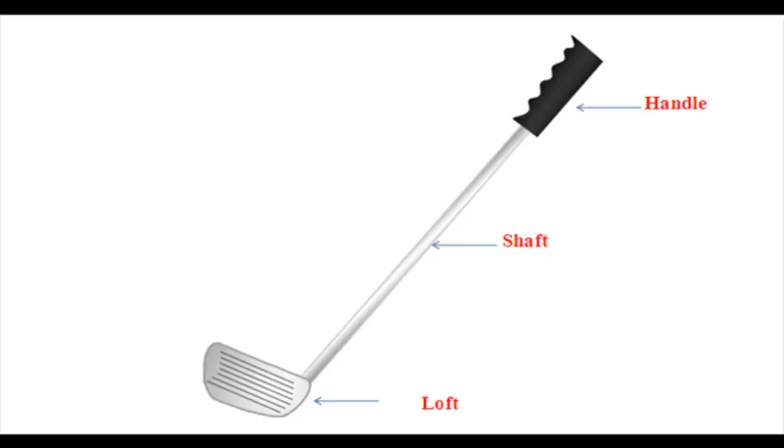The video shows the manufacturing of golf stick using metal forming techniques. A typical golf stick consists of a shaft and loft without any seam, with a handle for grip.

A die for extrusion of the shaft of the golf stick is shown in grey. A section view of the die shows the threaded portion for the handle grip.

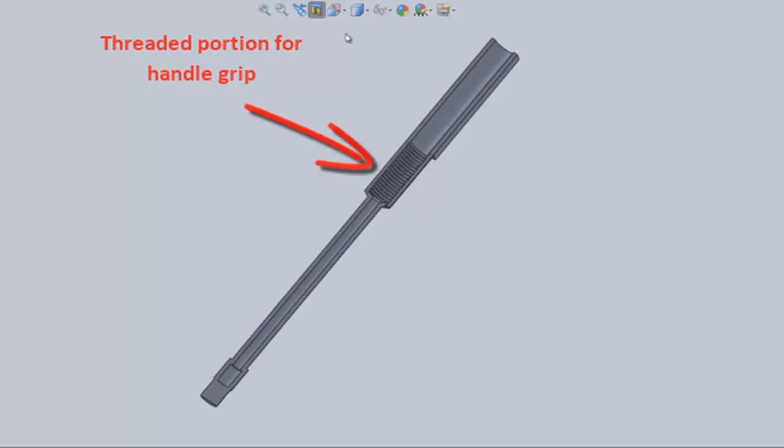In step 1, a red billet is placed at the top of the cavity in the extrusion die. A yellow plunger presses the red billet through the shaft channel in the extrusion die. It also has an accumulated portion for the loft at the end of the die.

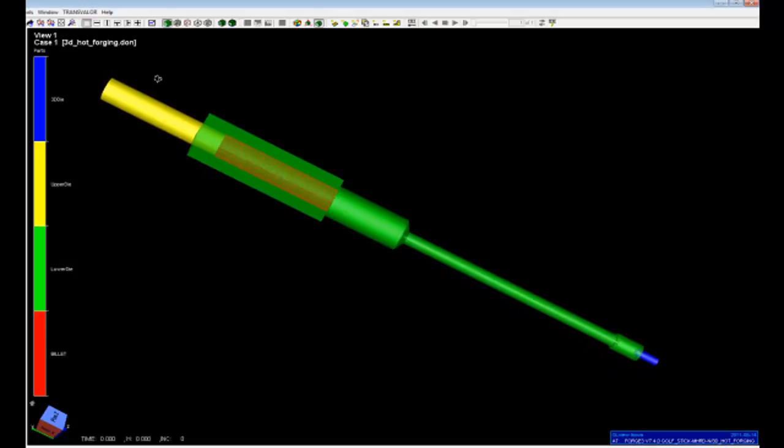The billet progressing in the die can be seen, and the temperature of the billet can be determined by the scale on the left hand side. After extrusion, forging of the loft is done to create different club heads.

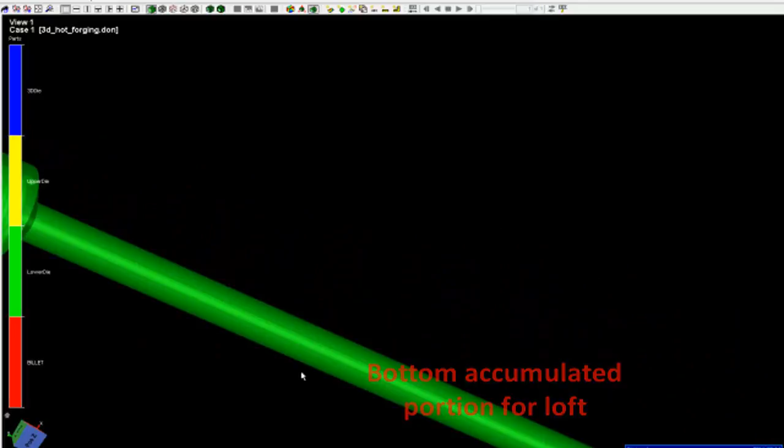The dies shown in green and yellow can have different cavities depending upon the club. After forging with the dies, the final loft section is shown at the end of the video.

The video shows the manufacturing of golf stick using metal forming techniques. A typical golf stick consists of a shaft and loft without any seam, with a handle for grip.

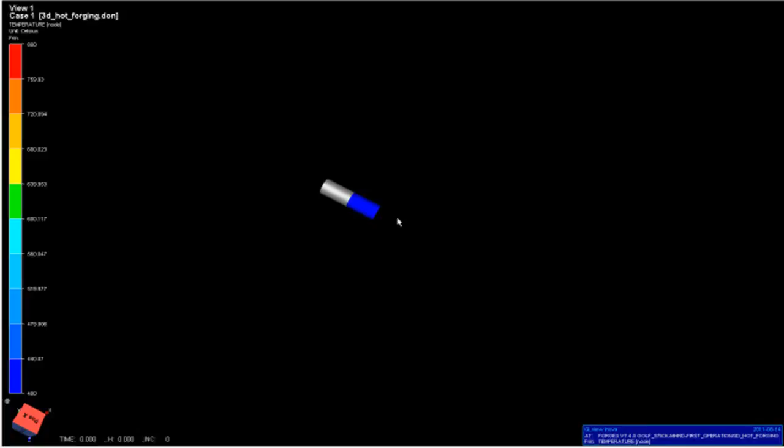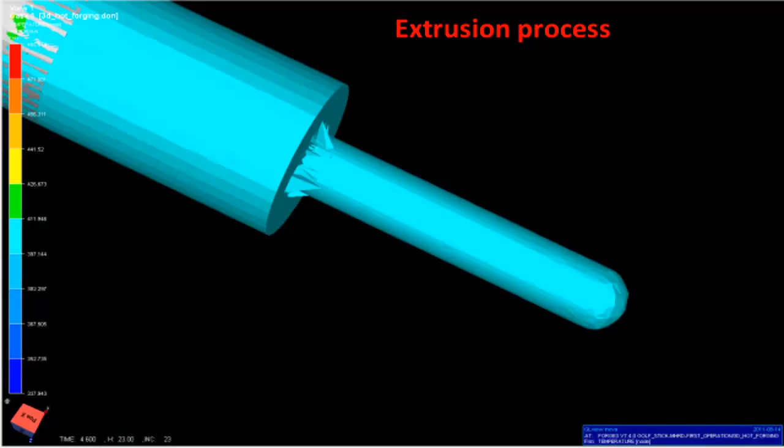The billet progressing in the die can be seen, and the temperature of the billet can be determined by the scale on the left hand side. After extrusion, forging of the loft is done to create different club heads.

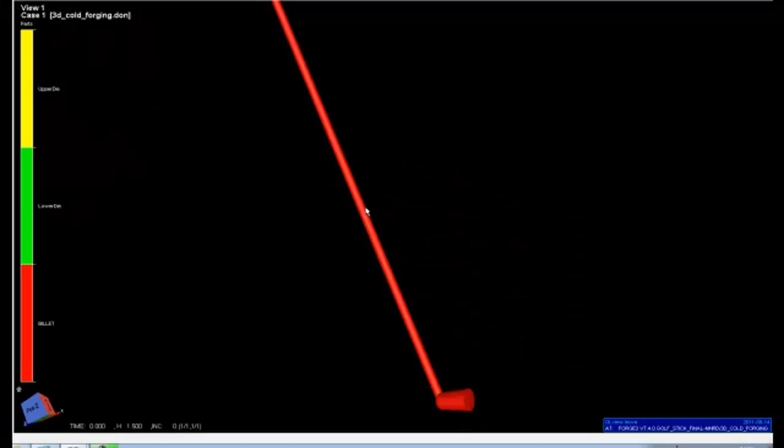The dies shown in green and yellow can have different cavities depending upon the club. After forging with the dies, the final loft section is shown at the end of the video.

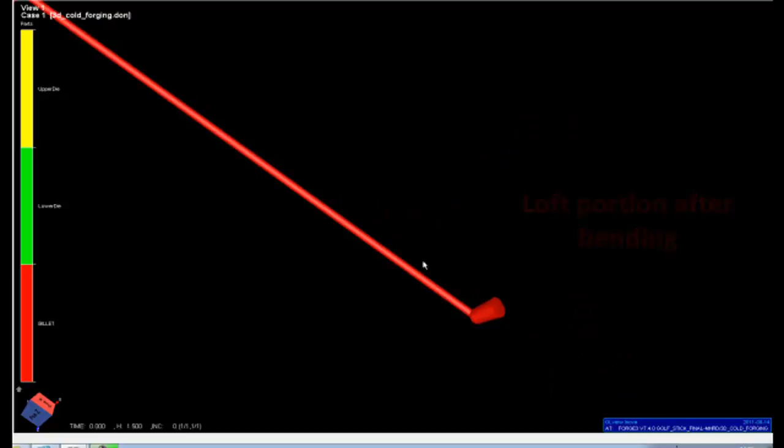The video shows the manufacturing of golf stick using metal forming techniques. A typical golf stick consists of a shaft and loft without any seam, with a handle for grip.

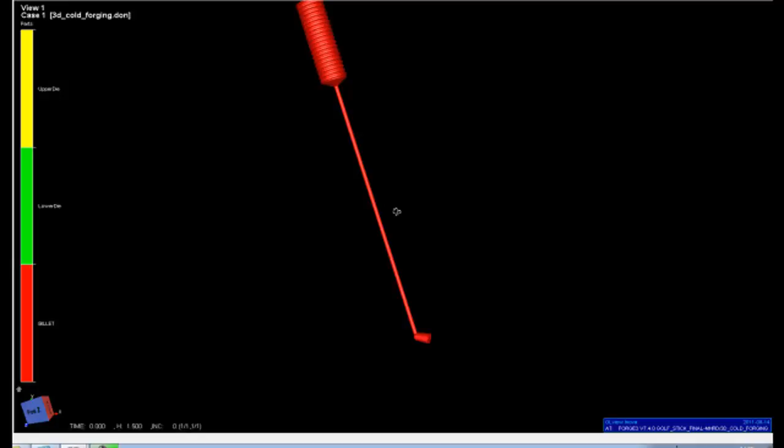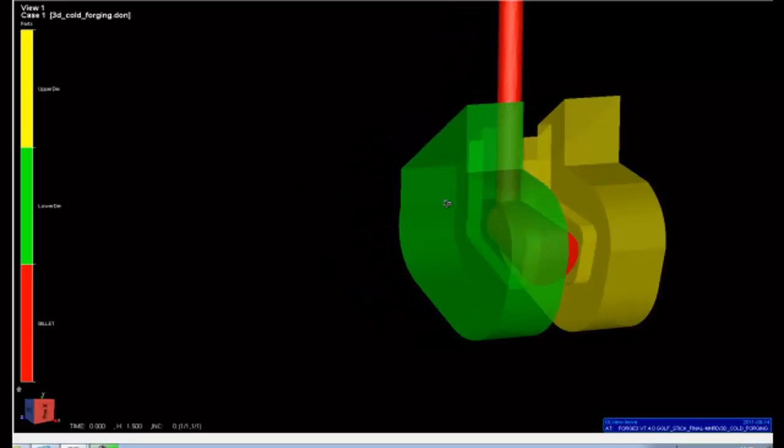In step 1, a red billet is placed at the top of the cavity in the extrusion die. A yellow plunger presses the red billet through the shaft channel in the extrusion die. It also has an accumulated portion for the loft at the end of the die.

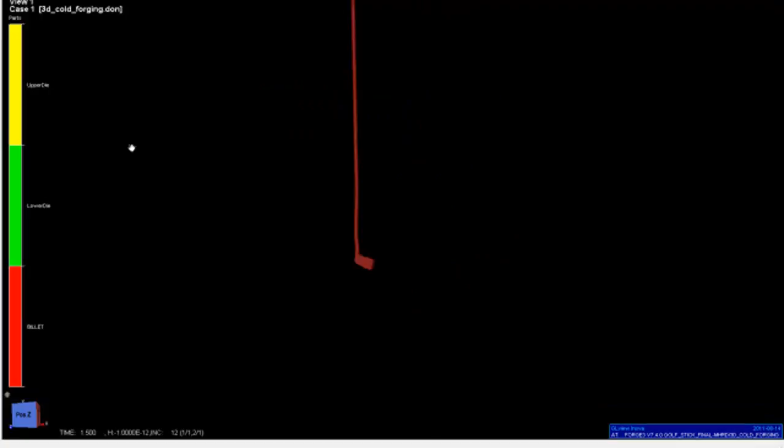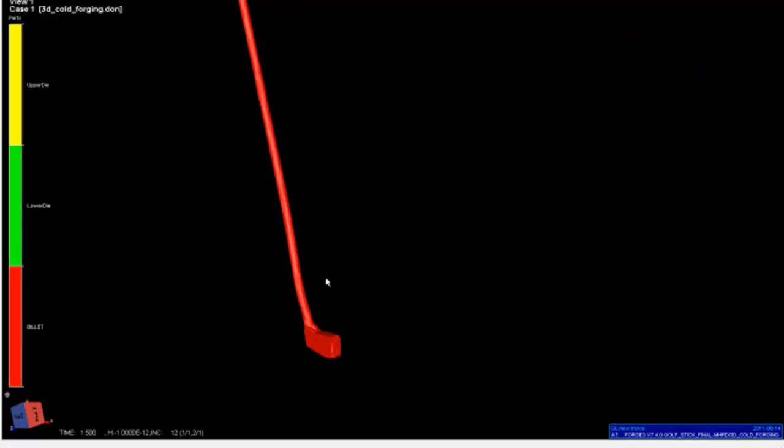The dies shown in green and yellow can have different cavities depending upon the club. After forging with the dies, the final loft section is shown at the end of the video.